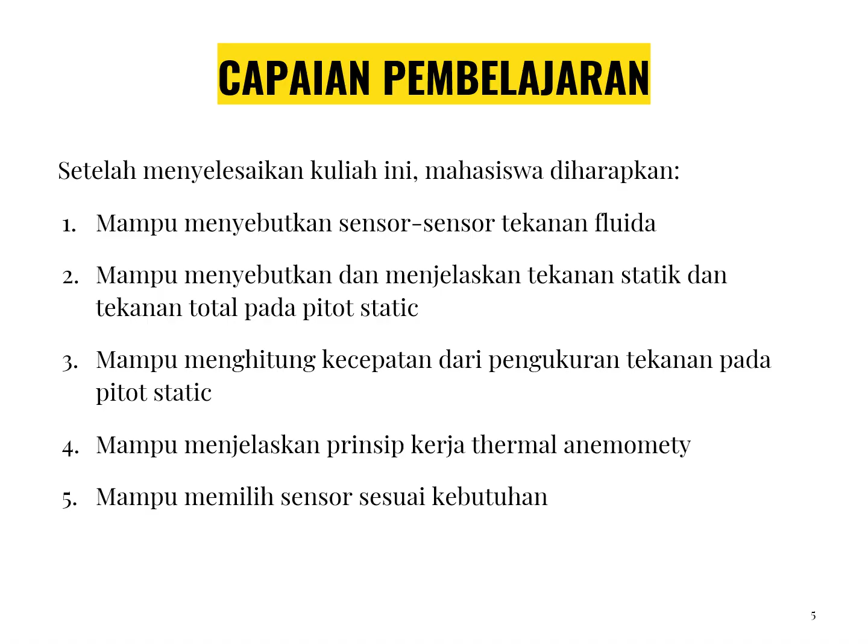Dalam pembahasan tentang tekanan, khususnya tentang pengukuran tekanan, Anda harus mengenal terlebih dahulu tekanan itu apa. Kemudian kalau kita mengukur tekanan itu bisa dinyatakan dengan apa?

Pengukuran tekanan fluida yang kita lakukan pada sebuah titik biasanya dinyatakan dengan istilah tekanan ukur atau tekanan absolut. Jadi, Anda harus ingat ada dua definisi: tekanan ukur dan tekanan absolut. Tekanan ukur itu biasanya tekanan yang dipengaruhi oleh tekanan atmosfer lokal.

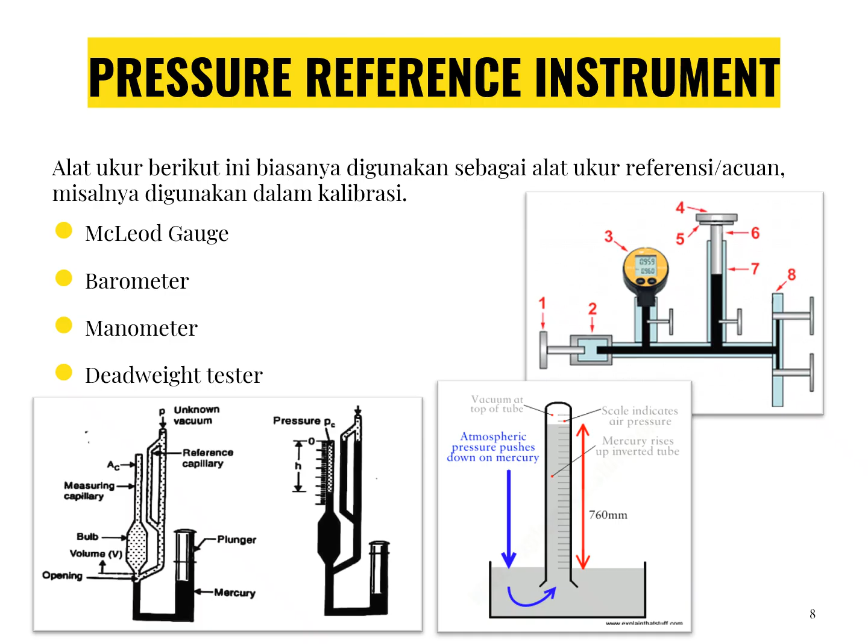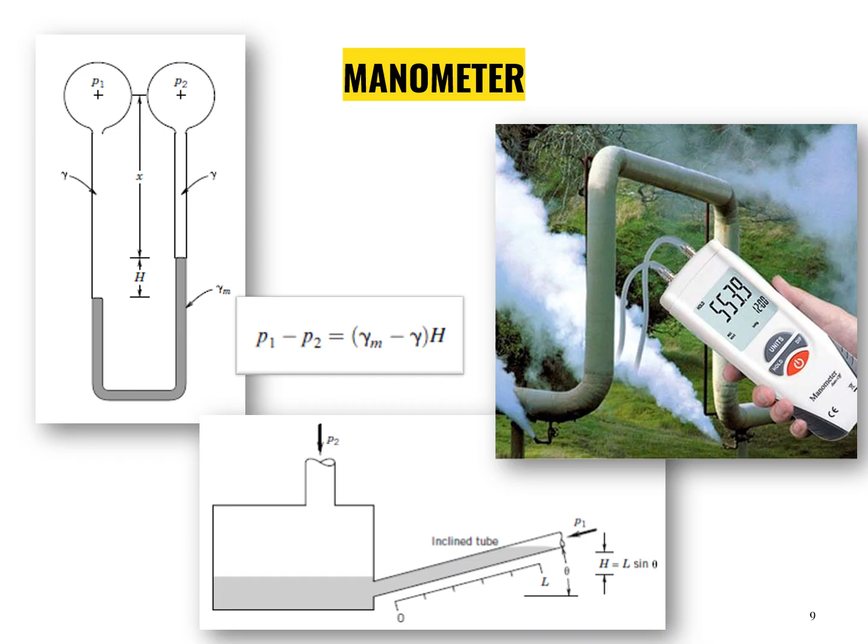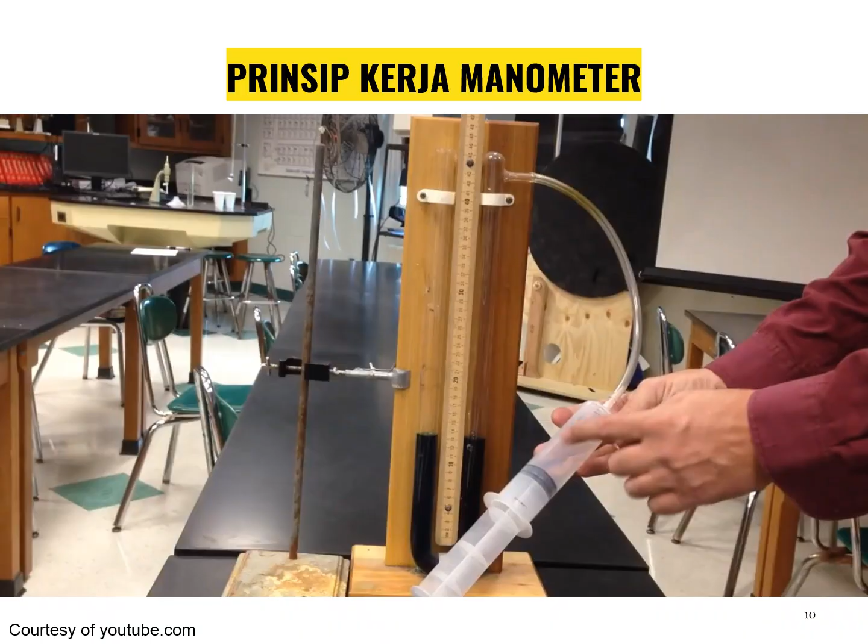So I have a manometer here, nothing too crazy. I've got an open end tube here, and you can see there's a measuring stick. I have some fluid filled with water, but originally this was mercury because Torricelli's earliest barometer used mercury. In any case, what I'm going to do is take a syringe and attach it to the enclosed tube, and now I'm going to make the space smaller for the same amount of gas that's trapped in this area. So by making the volume smaller, the pressure is going to increase.

So by Boyle's law, lowering the volume by forcing the gas molecules into a smaller space is going to increase the pressure. The manometer is going to measure that increase in pressure. When the pressure was equal, these levels were equal, because the pressure inside this tube is equal to the pressure pushing down in this open container. So the force on this liquid level is the same as the force on this liquid's level, and thus you have equal pressure.

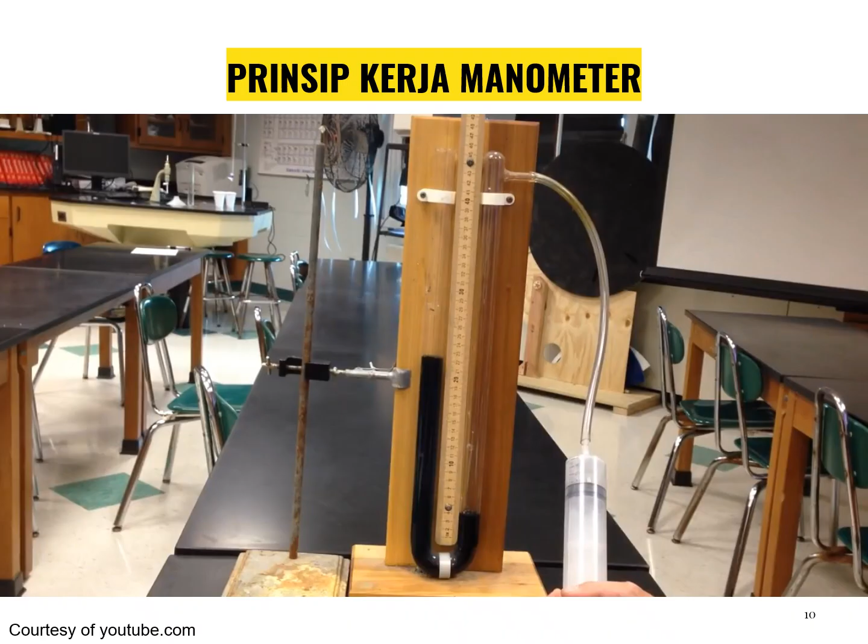Now by increasing the pressure, and I'm doing this by making the volume smaller, stuffing the same amount of gas at the same temperature into a smaller volume, I'm increasing the pressure. And what we can do is measure the difference of these liquids to measure the pressure.

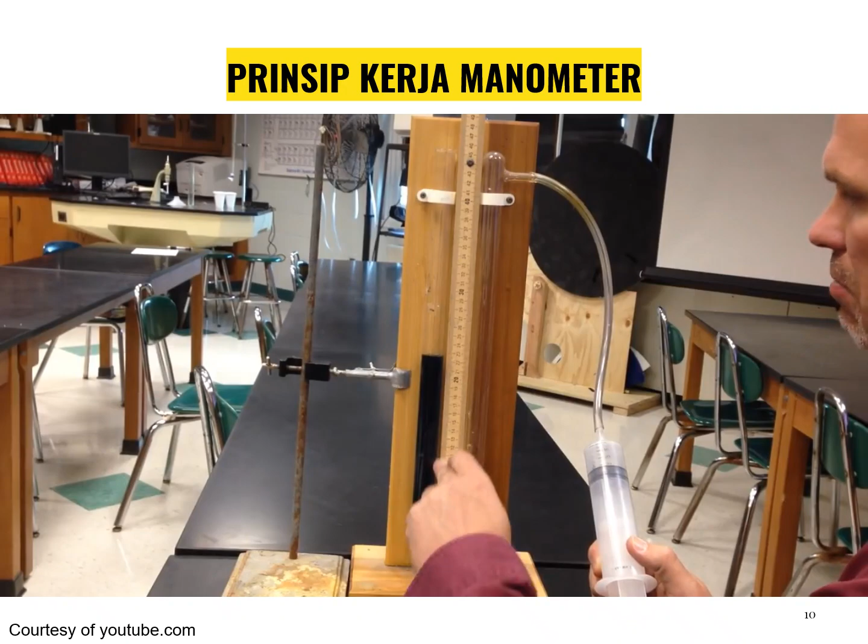Right now, if I wanted to measure the pressure, if this was mercury, let's pretend this is approximately 23, so this is 19. From this point here, I'm measuring 19 millimeters. Of course, I just measured 19 centimeters, so that's 190 millimeters of fluid I'm supporting upward. I would say the pressure in this area is higher than the atmospheric pressure pushing down.

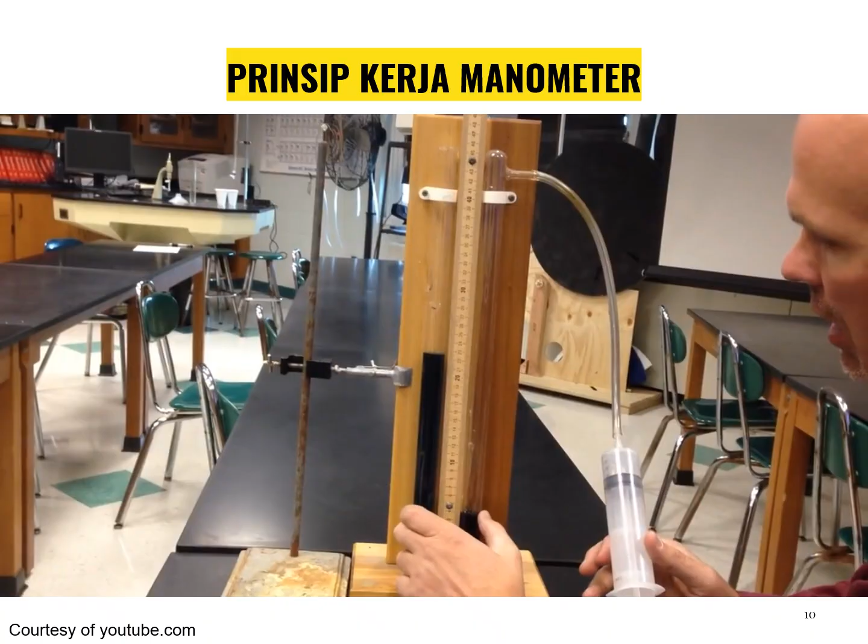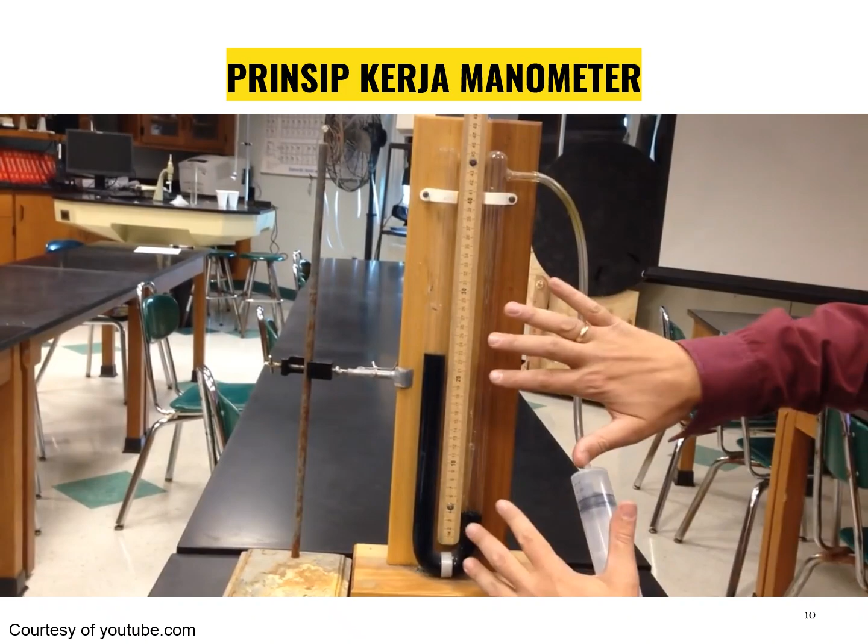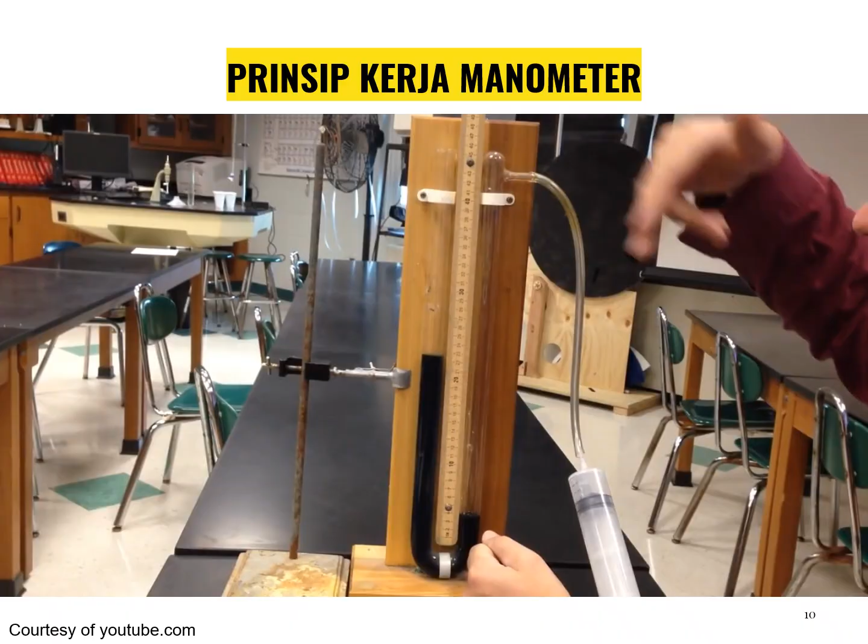Manometers use a differential of pressure to measure. Right now, the pressure in this syringe, which is connected, is 190 millimeters of mercury higher than atmospheric pressure. There's two forces pushing down, one here and one here. Clearly this side is winning by 190 millimeters of mercury, which is, by the way, a torr. So if the atmospheric pressure was 760 torr, it'd be 760 plus 190, and that's how we measure the pressure here.

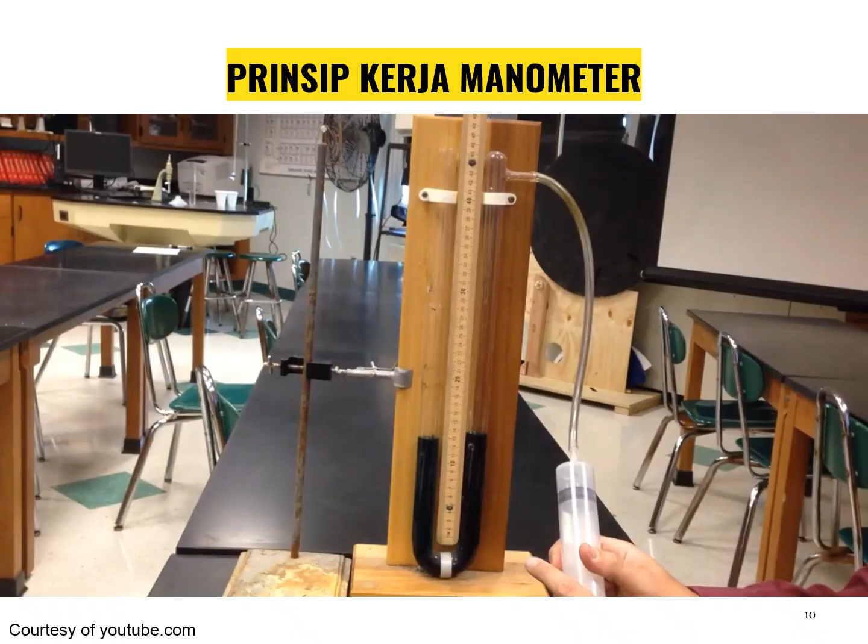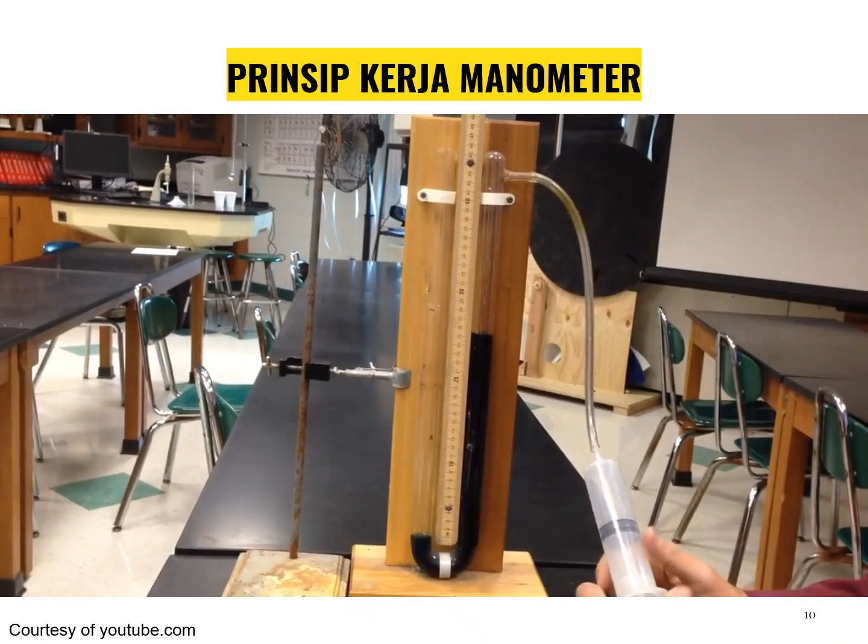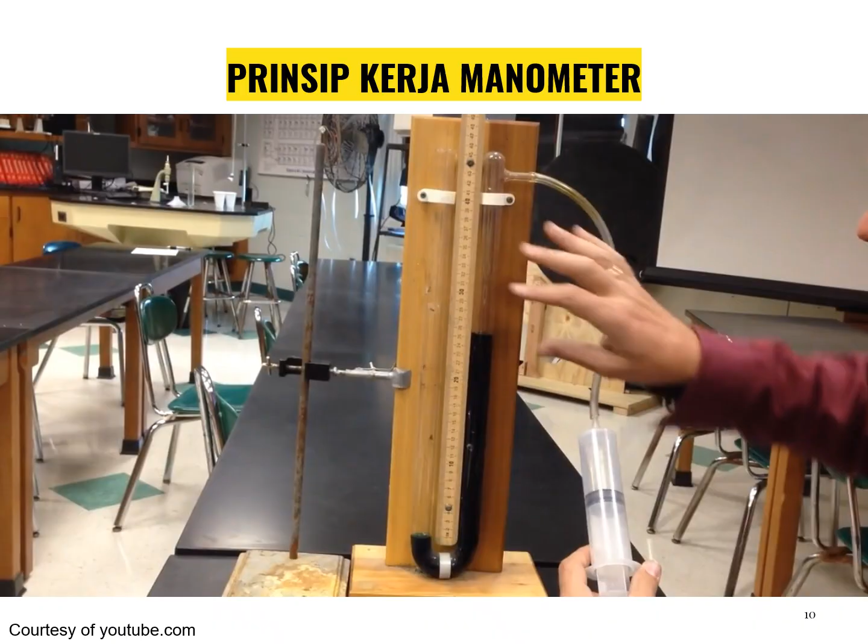If we go the opposite way, make them equal out again, and now I'm going to lower the pressure by making the volume larger. How much higher in pressure is the atmospheric pressure? This pressure is lowered, and the pressure on the open end is winning. Let's pretend it's also 19 centimeters, so 190 millimeters of mercury. So now the pressure in here is less than atmospheric pressure by 190, and we would do 760 minus 190, and that would be the pressure here. So this pressure here is lower. Clearly you can see the atmospheric pressure is winning by 190 millimeters of mercury.

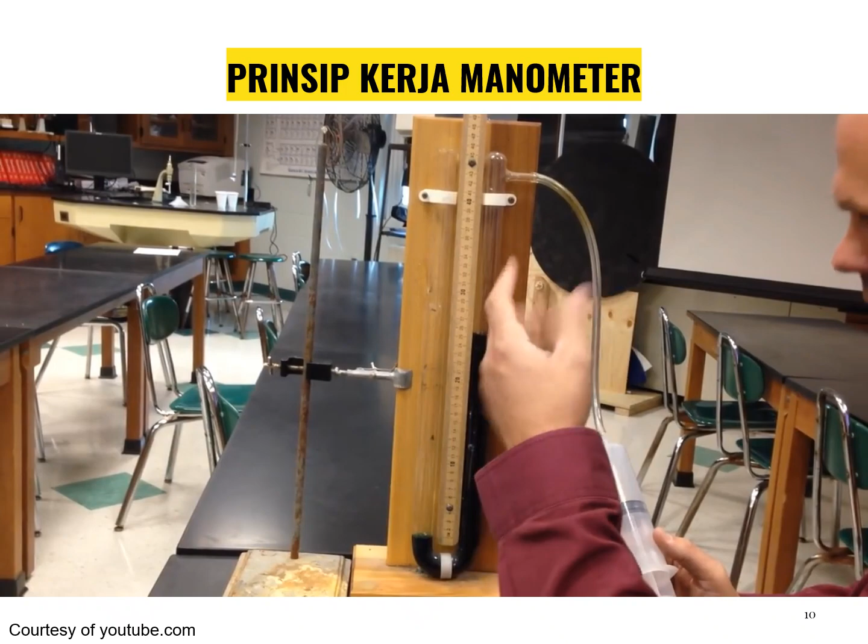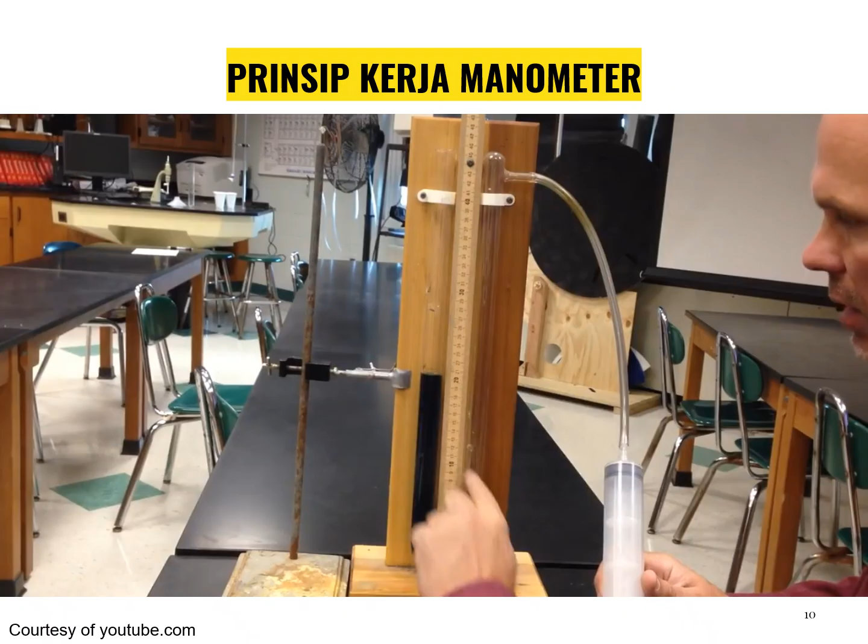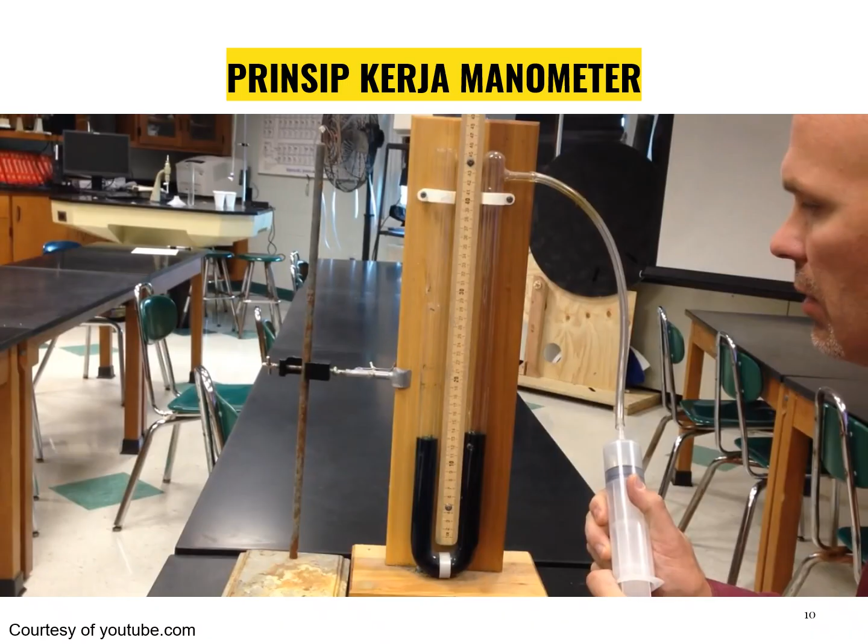Again, the pressure in here is 760 minus. When we did the other side, we increased the pressure. We said, well, this is pushing back on the atmosphere, plus it's supporting the column. So this is equal to the pressure outside, but you have to add 190 to it in this case. So manometers are used either subtracting or adding. Here we're equal, here this side is less than the atmospheric pressure by this much, and here the gas is greater than the atmospheric pressure by that much.

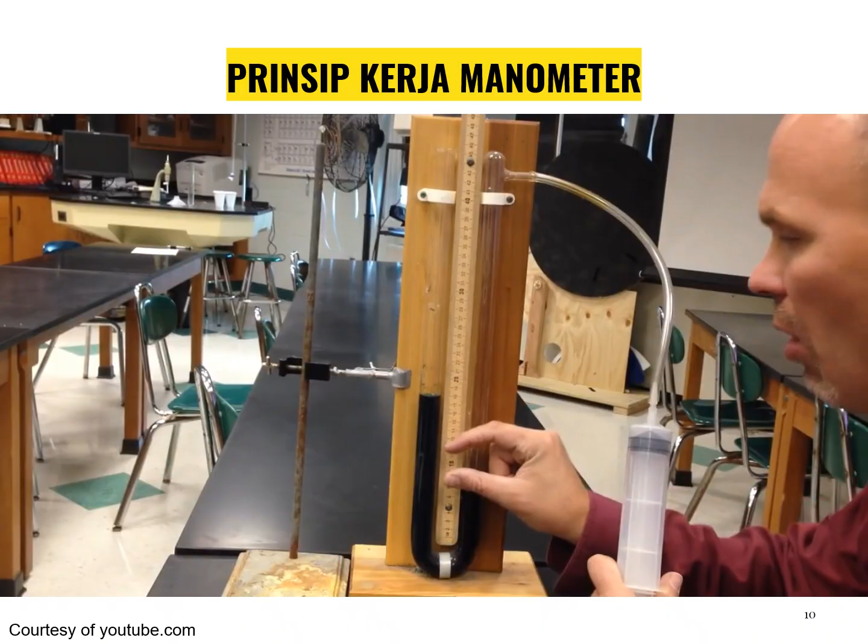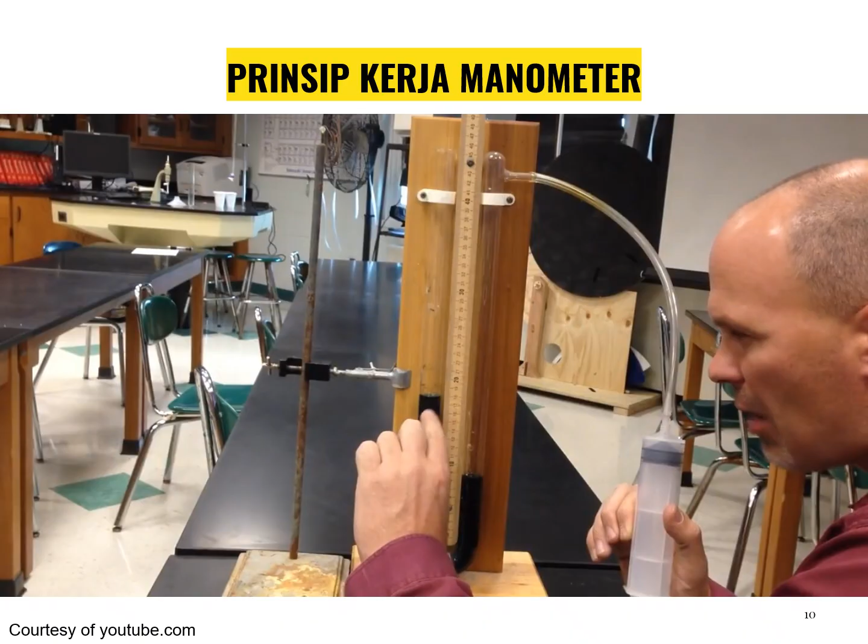Now, if we don't have mercury, we can change that into water. If this is water and not mercury, we can compare it to mercury's density by height times density equals height times density. Because mercury is 13.6 times more dense than water, its height is going to be 13 times smaller for the same weight being supported, but a lot less volume. So if this was water and I'm going to convert it to mercury, if we're using 190 millimeters, I divide it by 13.6, and that would be the height in mercury. So if we don't have mercury, we can certainly get there by doing those differences.

So that's a little basics of manometers.

That's so cool. Can I say hi? Can I be in your video? You are...

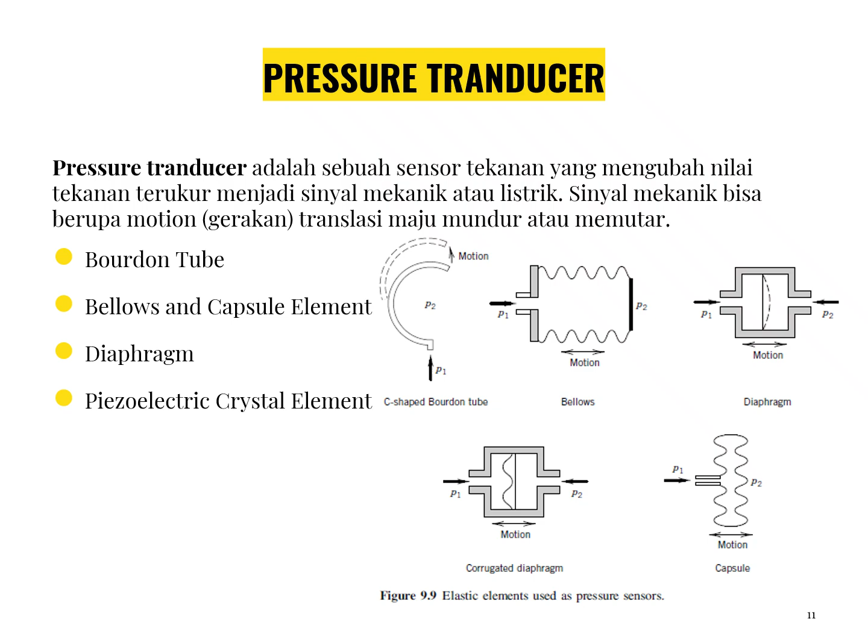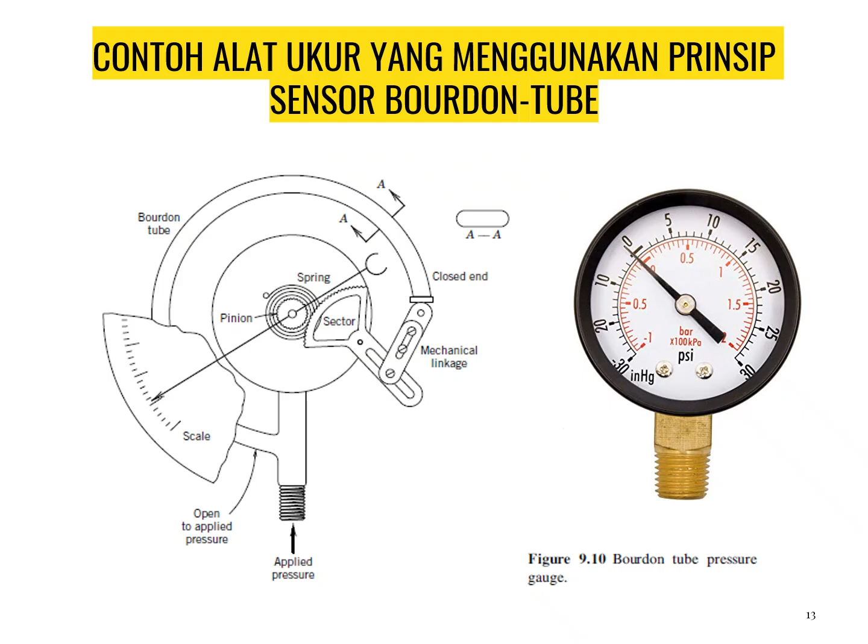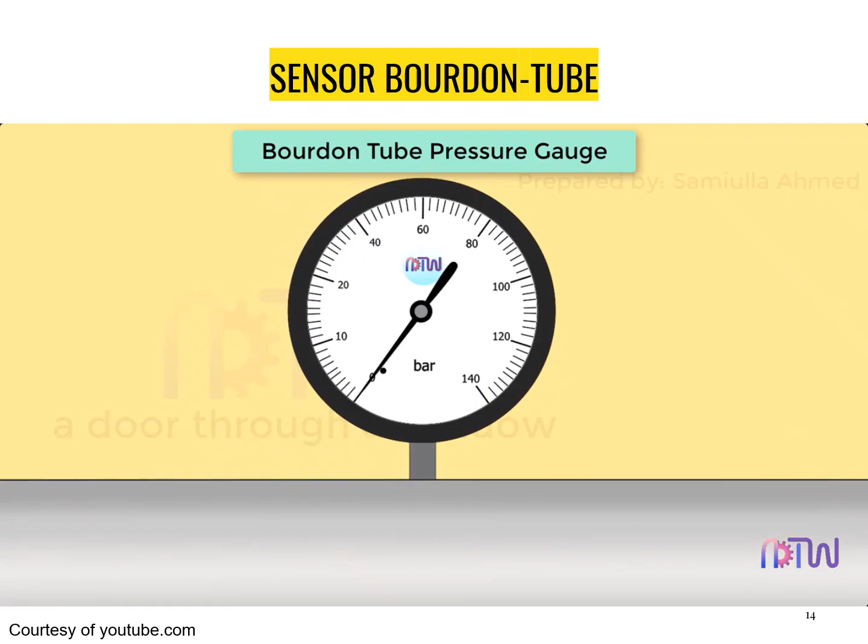Bourdon tube pressure gauge. Bourdon tube pressure gauges are used for the pressure measurement of relative pressure from 0.6 bar to 7,000 bars. They are classified as mechanical pressure measuring instruments and thus operate without any electric power.

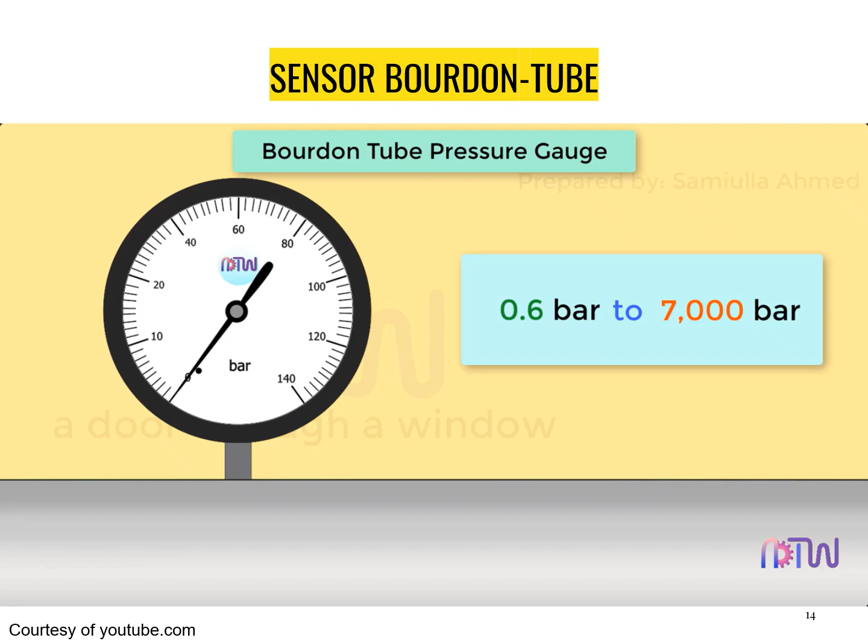This video will cover the following: 1. Working principle of Bourdon tube pressure gauge. 2. Construction. 3. Working. 4. Advantages and disadvantages.

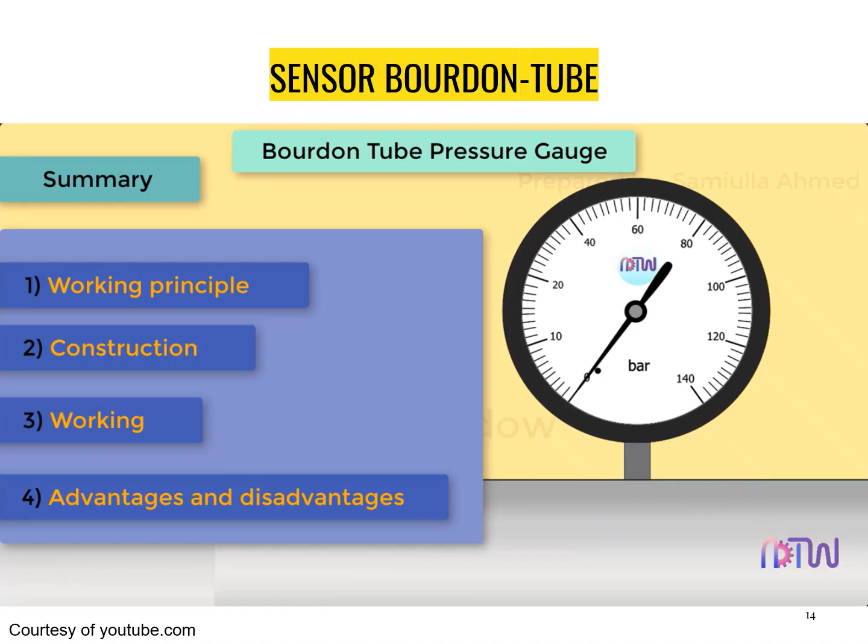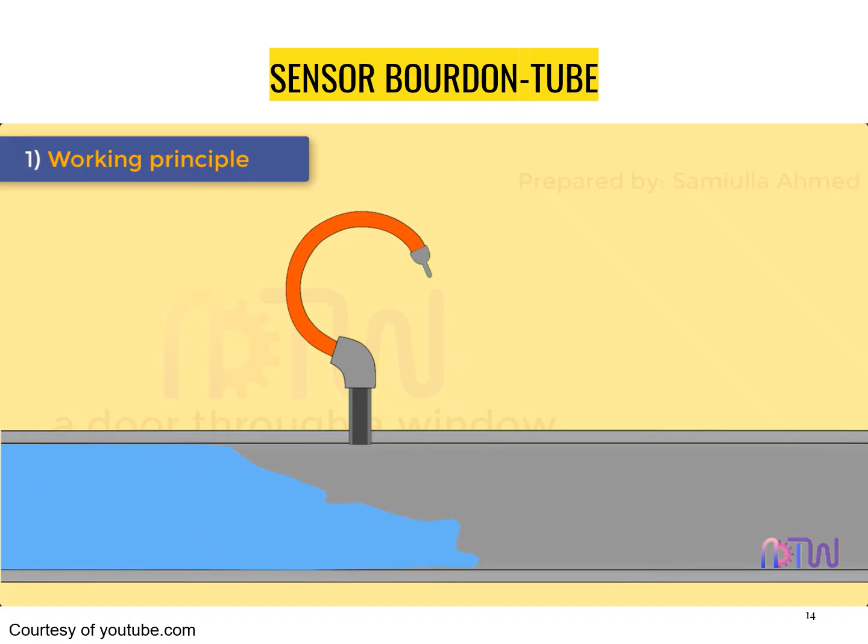Working principle of Bourdon tube pressure gauge. When an elastic transducer, such as Bourdon tube in this case, is subjected to a pressure, it deflects. This deflection is proportional to the applied pressure when calibrated.

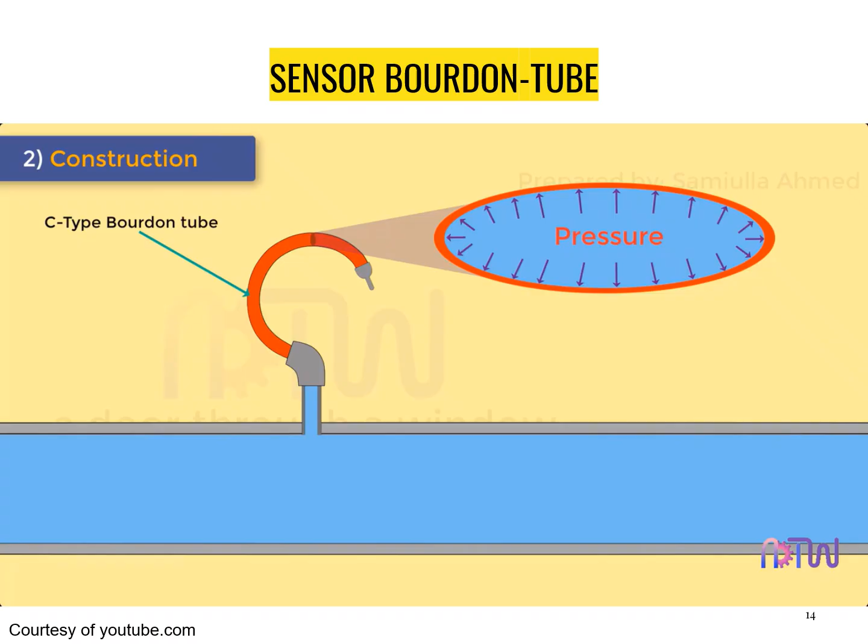Construction. A C-type Bourdon tube consists of a long thin-walled cylinder of non-circular cross-section, which is sealed at one end. This tube is made from materials such as phosphor bronze, steel, and beryllium copper, and attached by a light mechanism which operates the pointer. The other end of the tube is fixed and is open for the application of the pressure, which is to be measured.

The tube is soldered or welded to a socket at the base through which the fluid, whose pressure is to be measured, enters the C-type Bourdon tube.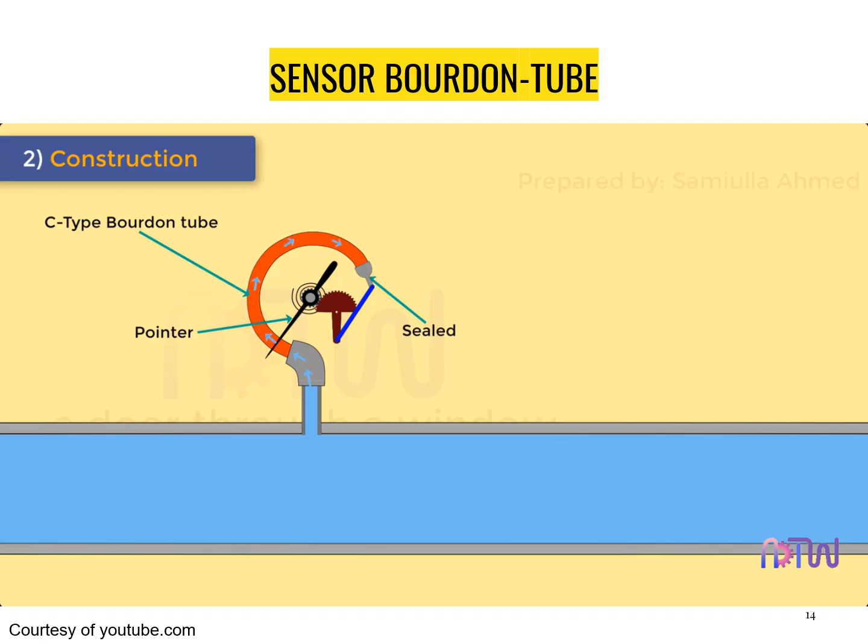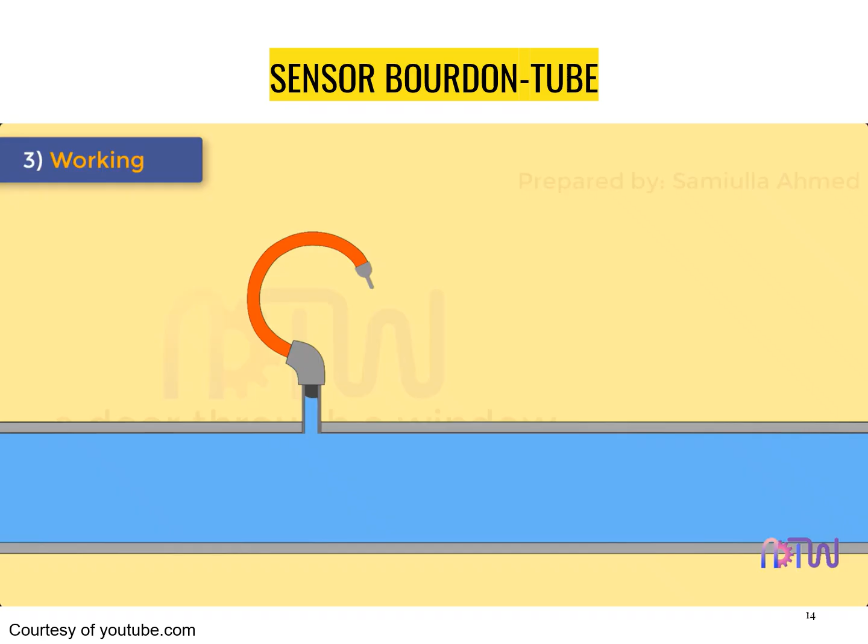Working of Bourdon tube pressure gauge. As the fluid under pressure enters the Bourdon tube, it tries to change the cross-section of the tube from oval to circular, and this tends to straighten out the tube.

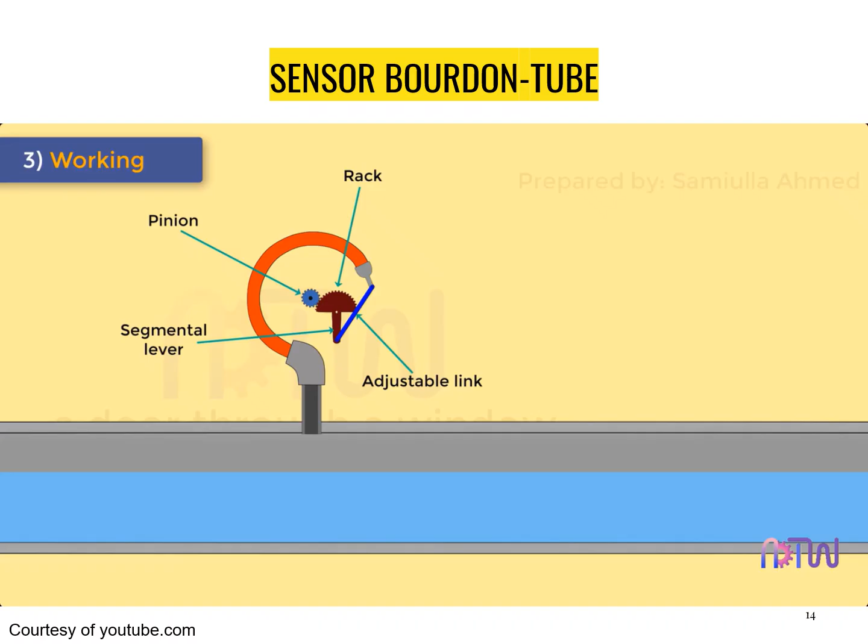The tip of the Bourdon tube is connected to a segmental lever through an adjustable link. The segmental lever end on the segment side is provided with a rack which meshes to a suitable pinion mounted on a spindle. The segmental lever is suitably pivoted and the spindle holds the pointer. The resulting movement of the free end of the tube causes the pointer to move over the scale.

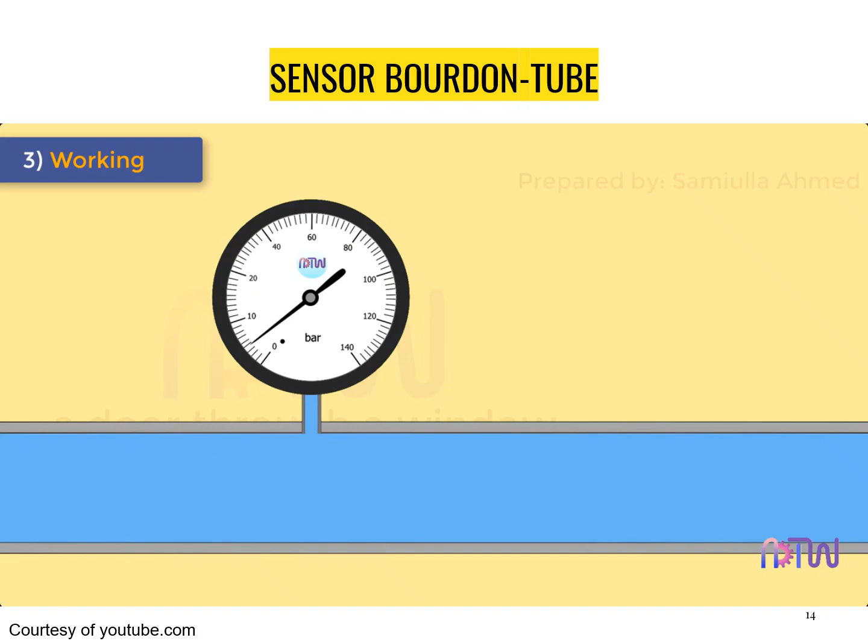In real-life application, the pressure gauges are mounted with a siphon tube. Siphon tube is a simple device used to protect a pressure sensor from high-temperature media, such as steam. It can also be used to reduce the potentially damaging effects of rapid pressure changes. When first installed, the siphon should be filled with water or some other suitable separating medium. This medium continuously remains in contact with the Bourdon tube.

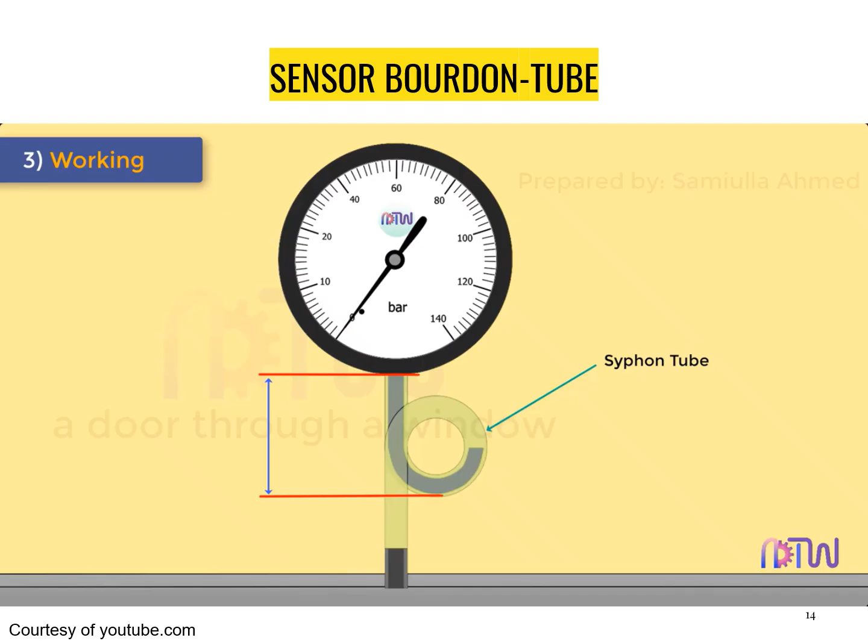Bourdon tubes are generally made in 3 shapes: C-type, helical type, and spiral type.

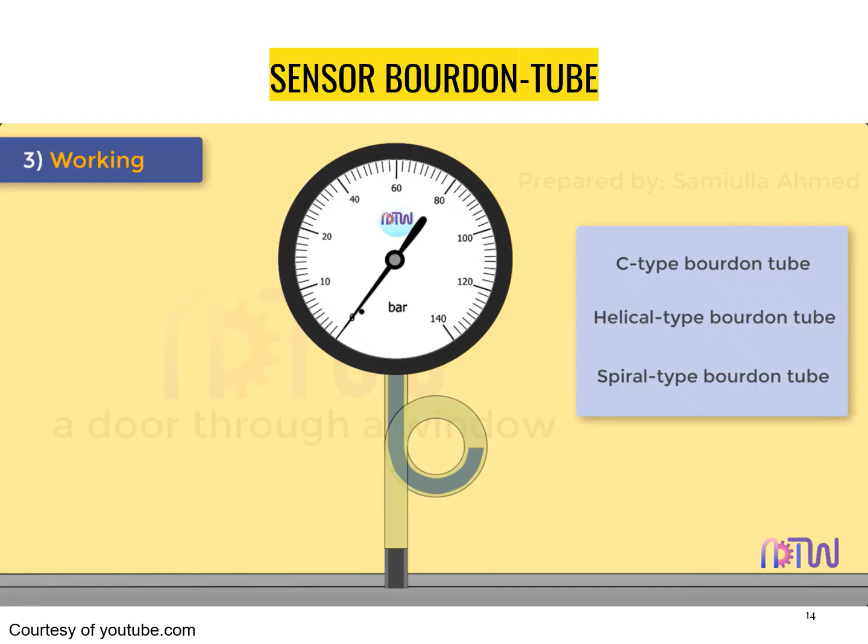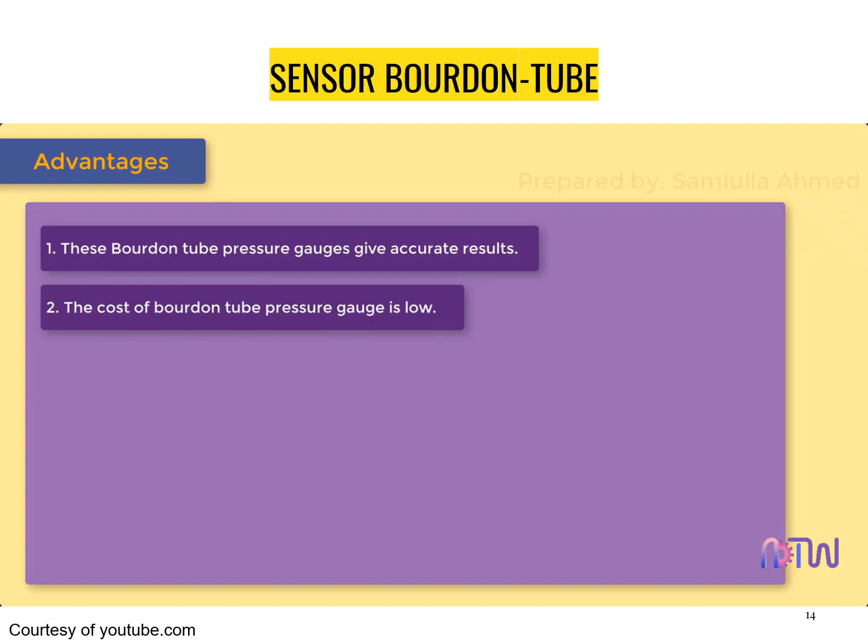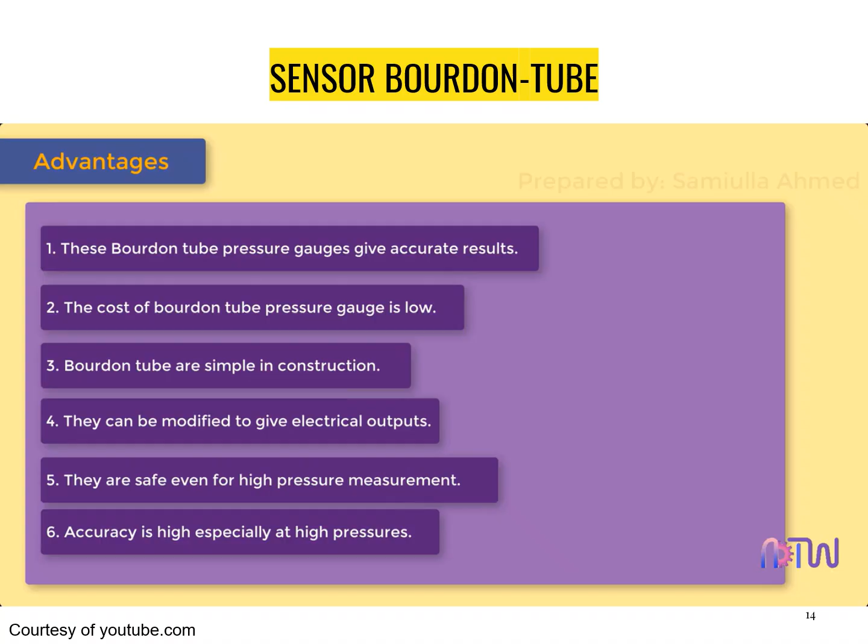Advantages of Bourdon tube pressure gauges: 1. These gauges give accurate results. 2. The cost is low. 3. They are simple in construction. 4. They can be modified to give electrical outputs. 5. They are safe even for high pressure measurement. 6. Accuracy is high, especially at high pressures.

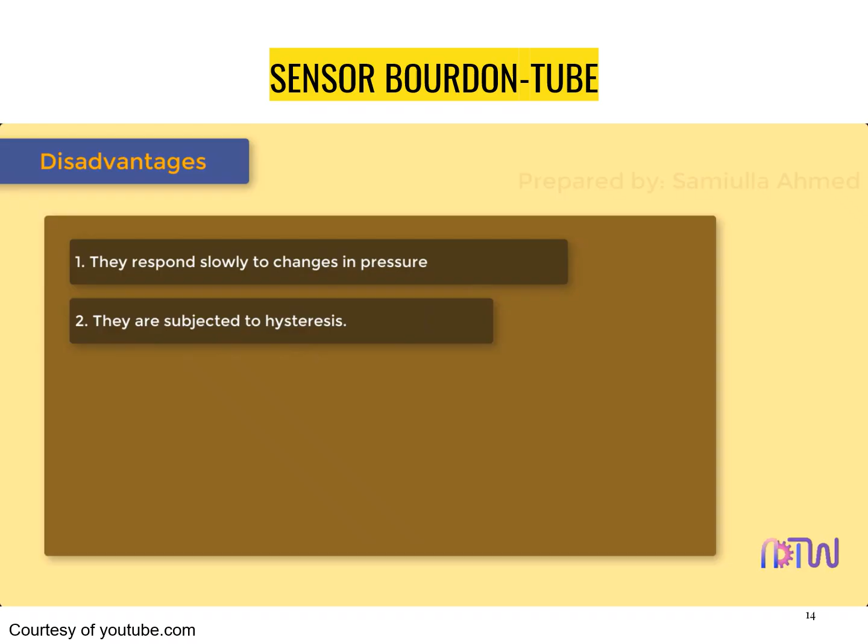Disadvantages of Bourdon tube pressure gauges: 1. They respond slowly to changes in pressure. 2. They are subjected to hysteresis. 3. They are sensitive to shocks and vibrations. 4. Amplification is a must, as the displacement of the free end of the Bourdon tube is low. 5. It cannot be used for precision measurement.